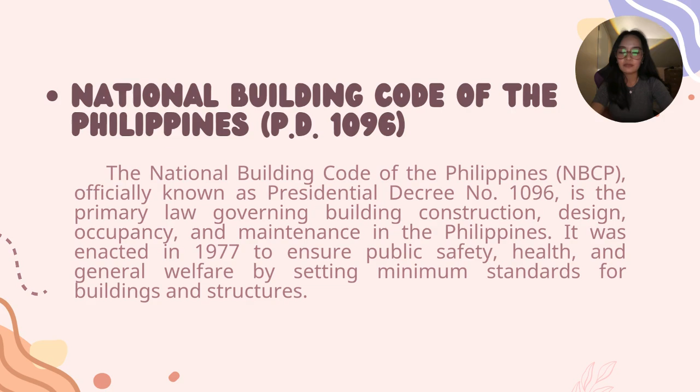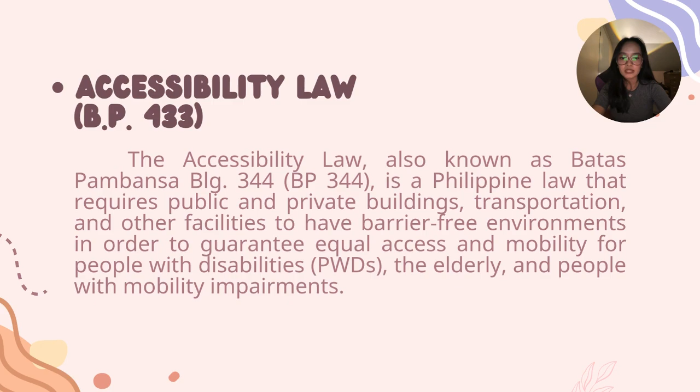The Accessibility Law, also known as Batas Pambansa 344, is a Philippine law that requires public and private buildings, transportation, and other facilities to have barrier-free environments in order to guarantee equal access and mobility for people with disabilities, the elderly, and people with mobility impairments.

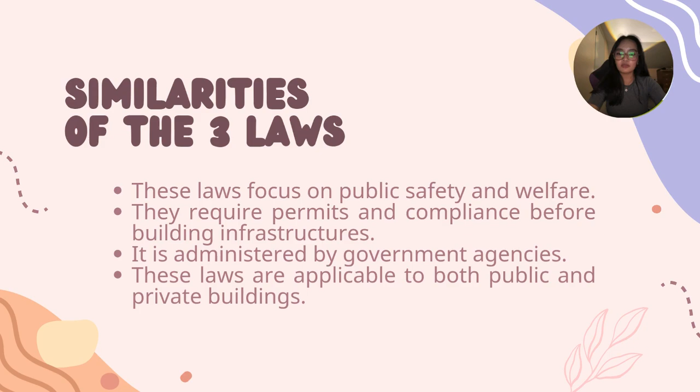So the similarities of the three laws are these laws focus on public safety and welfare. They also require permits and compliance before building infrastructures. It is also administered by government agencies. And lastly, these laws are applicable to both public and private buildings.

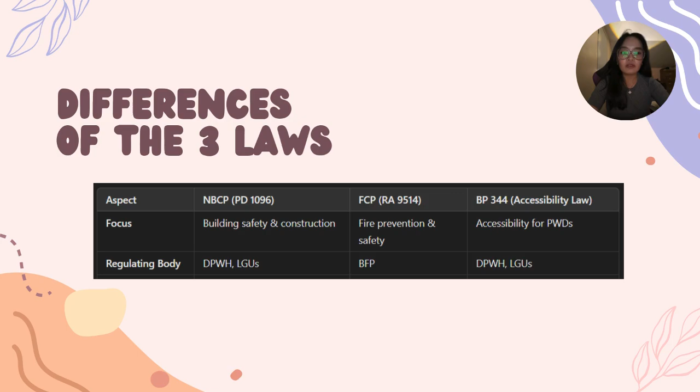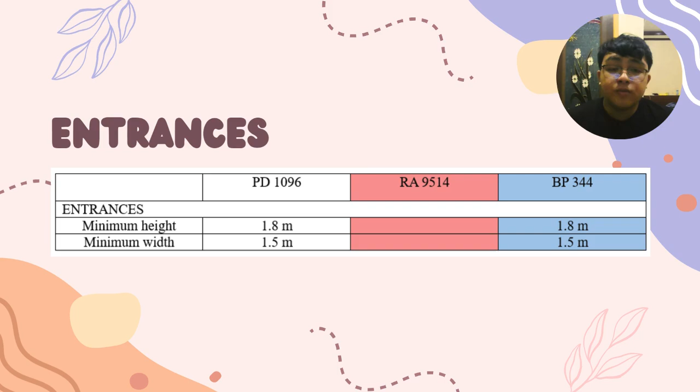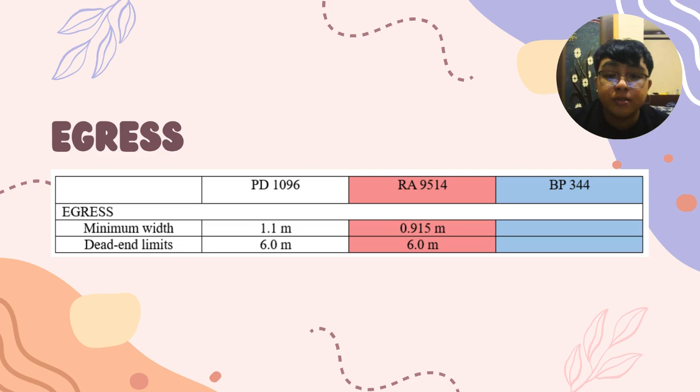Egress. The minimum width of egress is 1.1 meters in National Building Code, but in the Fire Code it is 0.915 meters. But in the dead end limits, they are both 6.0 meters. Parking areas. So the minimum width of parking areas is 3.7 meters, and the clear width of walkway from accessible spaces is 1.2 meters. This is the standard of both Accessibility Code and National Building Code.

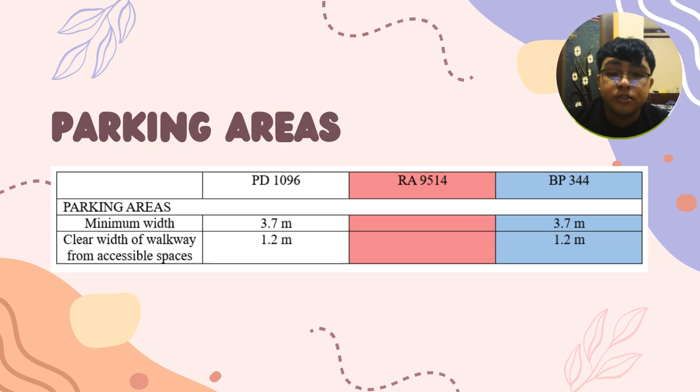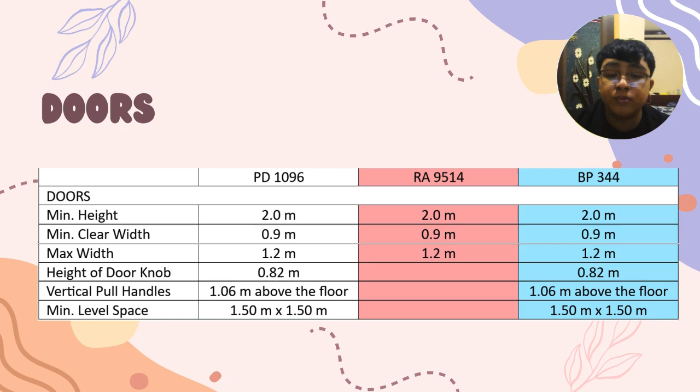Doors. So the standard of doors is the same in three laws. So the minimum height is 2.0 meters, the clear width is 0.9 meters, the maximum width is 1.2 meters, the height of doorknob is 0.82 meters, the vertical pull handles is 1.06 meters above the floor, and the minimum level space is 1.50 meters by 1.50 meters.

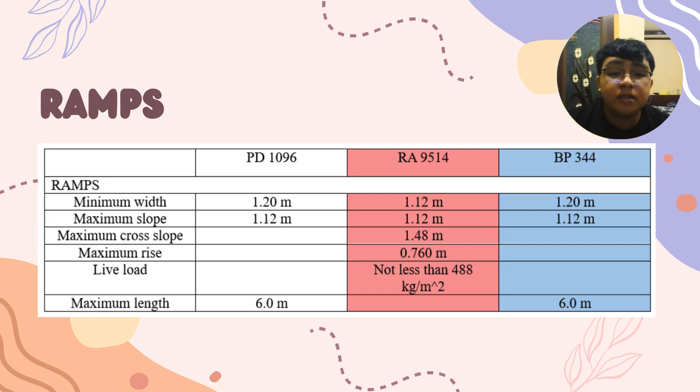Ramps. The minimum width of ramps is 1.20 meters both in Accessibility and National Building Code. But in the Fire Code, the standard is 1.12 meters. The maximum slope is 1:12 in those three laws. The maximum cross slope is 1:48, and the maximum rise is 0.760 meters. The live load is not less than 488 kg per square meter, and the maximum length is 6.0 meters.

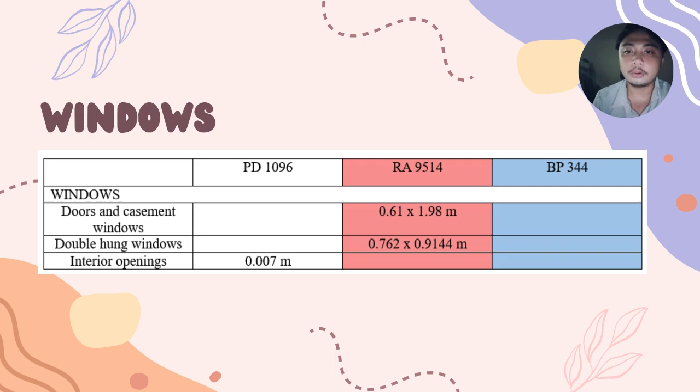So I'm going to talk about windows. For doors and casement windows, according to Fire Code, the measurement is 0.61 by 1.98 meters. And for double hung windows, the measurement is 0.762 by 0.9144 meters. And for interior openings, according to National Building Code, the measurement is 0.007 meters.

And for handrails, according to National Building Code and Accessibility Law, the height must be 0.70 to 1.06 meters. And according to Fire Code, the height must be 0.76 to 0.865 meters. And the inner handrail located within, according to Fire Code, 0.61 meters measured horizontally. And for the clearance handrail to wall, according to National Building Code and Accessibility Law, 0.05 meters attached to walls. And according to Fire Code, 0.38 meters.

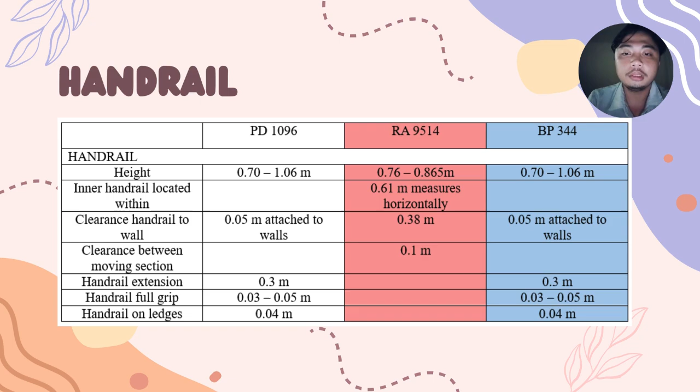And for clearance between moving sections, according to Fire Code, 0.1 meters. And for handrail extension, according to National Building Code and Accessibility Law, 0.3 meters. And handrail full grip, 0.03 to 0.05 meters. And handrail on ledges, according to National Building Code and Accessibility Law, the measurement is 0.04 meters. For headroom, according to the three laws, the measurement is 2 meters.

Next is for crossings. The depth of central refuges, according to National Building Code and Accessibility Law, the measurement is 1.5 meters. Next is the width of carriageway. According to National Building Code and Accessibility Law, the measurement is 10 meters. And the minimum for steady green pedestrian for National Building Code and Accessibility Law is 6 seconds.

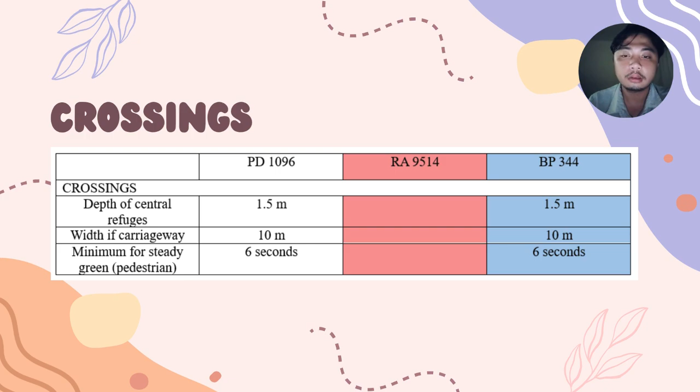So for elevators, the National Building Code and the Accessibility Code state that the accessible elevator should be located not more than 30 meters. And for the minimum dimension, it is 1.1 by 1.4 meters. And the heights should range from 0.9 meters to 1.2 meters.

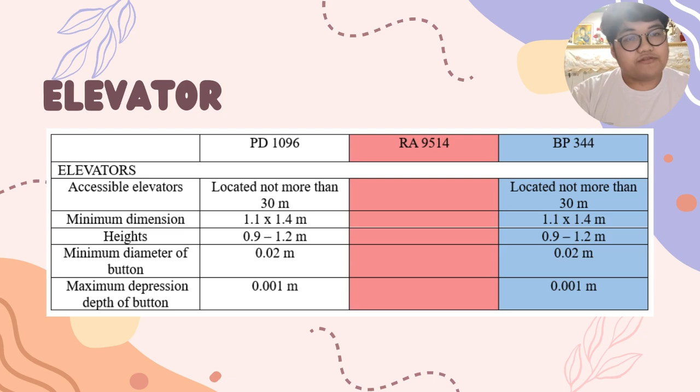And for the minimum diameter of the buttons, it should at least be 0.02 meters. And for the maximum depression for the depth of the button, it should only be 0.001.

For the vestibule, the minimum net area should only be 1.5 square meters. Minimum opening for its exterior wall is 6 meters. The minimum width is 1.12 meters. And its minimum direction of travel is 1.83 meters. Its ceiling should only be lesser than 0.51 meters.

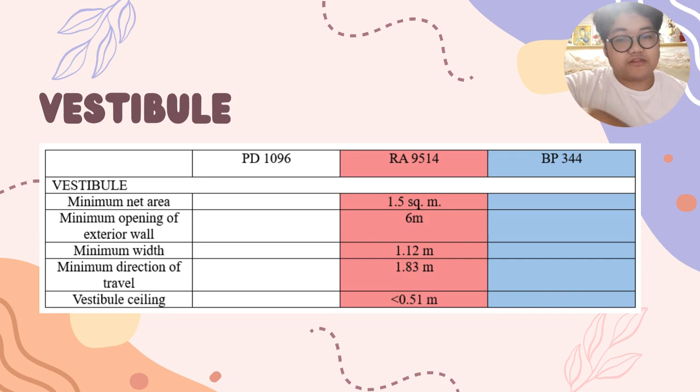The wheelchair. The National Building Code and the Accessibility Code both state that the length should only be 1.1 up to 1.3 meters. The width of the wheelchair should only be 0.6 to 0.75 meters. The wheelchair turning spaces should only be 1.5 meters. And the comfortable reach of a person should only be 0.7 until 1.2 meters. For the comfortable clearance for knee and leg space under tables, it's only 0.7 meters.

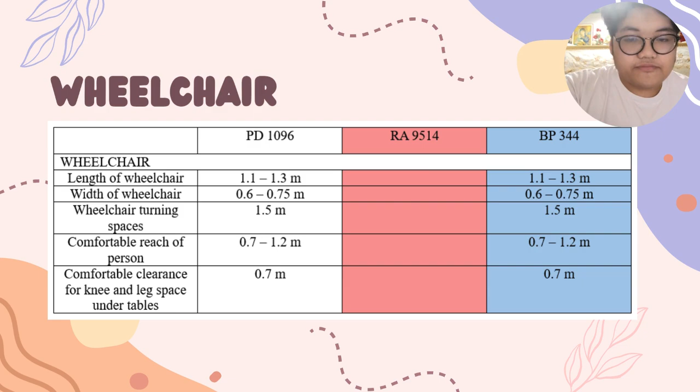The stairs. The fire code states that the width should only be 1.12 meters to 1.42 meters, and the height of the riser should only be 0.18 meters, and the minimum tread depth should only be 0.1 meter. And for the tactile strip, it is only 0.23 to 0.28 meters.

But the National Building Code and the Accessibility Code both state that the width should only be 0.9 to 1.1 meters, and the height should only be 0.2 meters. As for the tread depth, it should only be 0.25 at minimum, and the tactile strip 0.3 meters, and the maximum dimension of the landing, it should only be 1.2 meters.

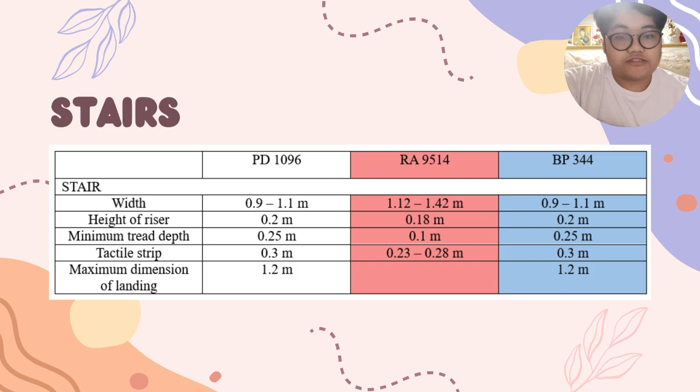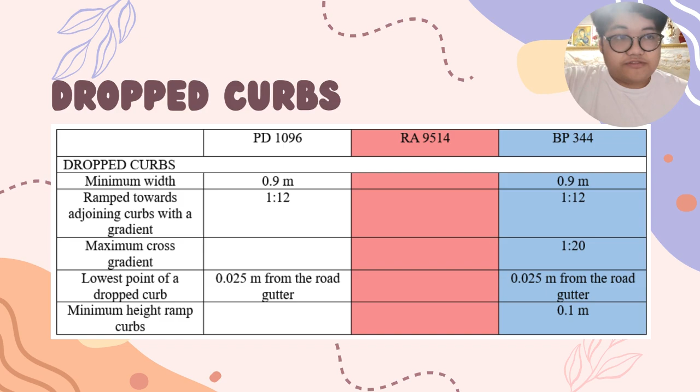Drop curbs. The National Building Code and the Accessibility Code both state that the minimum width should only be 0.9 meters, and the ramp towards the adjoining curbs with a gradient should only be 1 to 12, but the maximum cross gradient for the Accessibility Code should only be 1 to 20. The lowest point of the drop curb should only be 0.025 meters from the road gutter for both the National Building Code and the Accessibility Code, and the minimum height ramp for the curbs for the Accessibility Code is only 0.1.

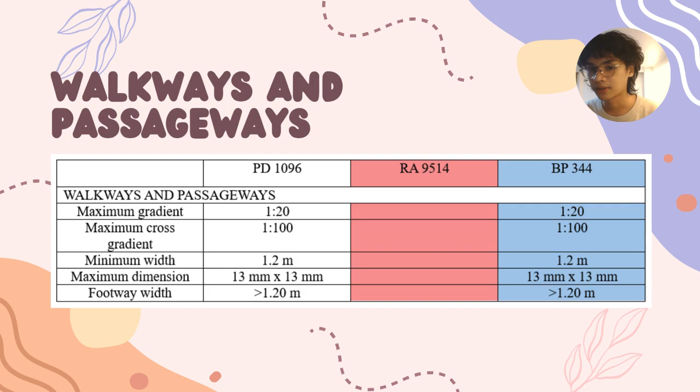For the accessibility law, BP 344, 1:20 is for the maximum gradient, 1:100 is for the maximum cross gradient, 1.2 m is for the minimum width, 13 mm x 13 mm is for the maximum dimension, and the footway width is 1.20.

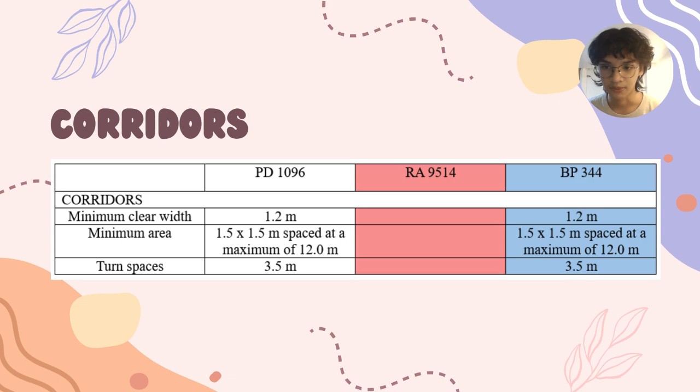And then for the corridors, the minimum clear width in the National Building Code PD 1096 is 1.2 meters, and the minimum area is 1.5, spaced at a maximum of 12 meters. For turn spaces, the measurement is 3.5 m. And for the accessibility law, BP 344, the minimum clear width is 1.2 m, same as the National Building Code, and for the minimum area, we also have 1.5, spaced at a maximum of 12 meters, and for the turn spaces, we have 3.5 meters.

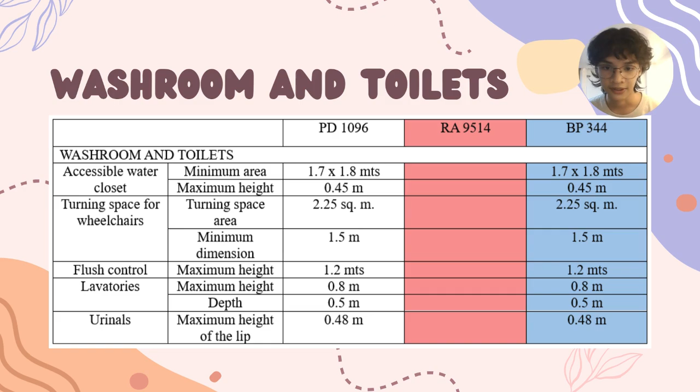And for the measurements for the accessibility law, BP 344, we have the minimum area of 1.7 meters, and the maximum height of 0.45 meters. For the turning space area for wheelchairs, we have 2.25 square meters. For the minimum dimension, we have 1.5 meters. For the flush control, we have 1.2 meters. For the maximum height in lavatories, we have 0.8 meters, and for the depth, 0.5 meters. And for the maximum height of the lip, we have the same measurement as the National Building Code, which is 0.48 meters.

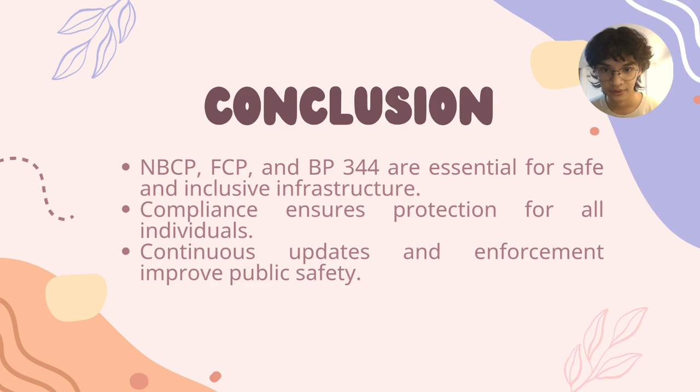So, in conclusion, the National Building Code of the Philippines, the Fire Code of the Philippines, and BP 344, which is an accessibility law, are essential for safe and inclusive infrastructure. Compliance ensures protection for all individuals, and continued updates and enforcement improve public safety.